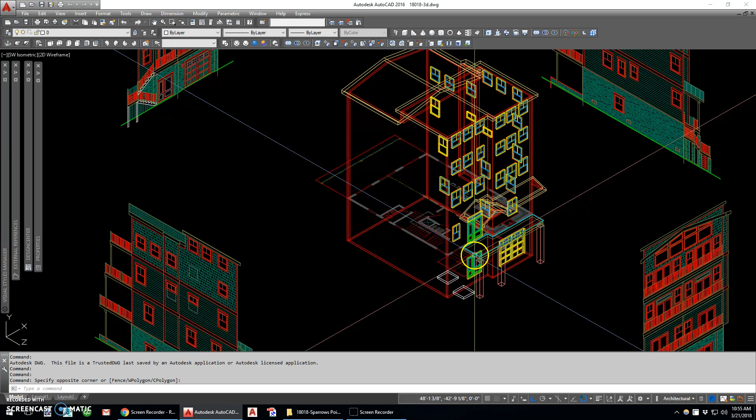All right, we're back. Not sure what number we're on, but time to make more progress and finish this job up. Right now it looks like I left off creating the staircase. I've got the landings and my deck up here. I'm guessing I drew my landings as I copy this back just to line it up, just to the bottom. So I've still got the wood decking I have to put on like this.

Since these objects are fairly done, I'm going to go ahead and match properties to something else on the trim layer. Let's go ahead and create the decking on top.

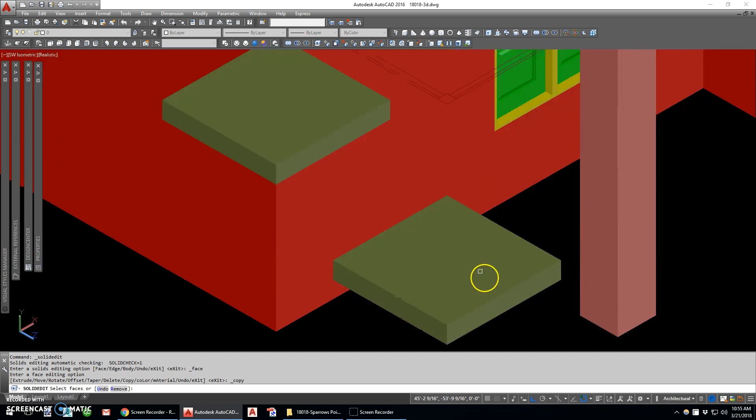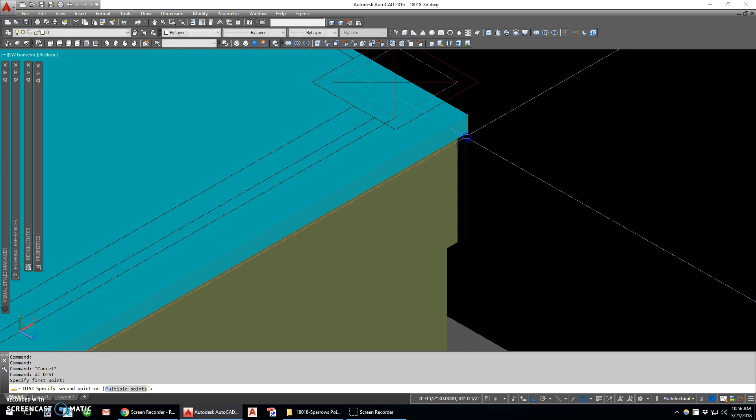I'm going to copy this face, and I'm going to copy this face. I'm going to extrude them both 1.5. I'll leave the overhangs—let's see, did I draw the overhangs on there? I did, and my overhangs were a half inch, so I'll leave these flush for now, but put them on this layer.

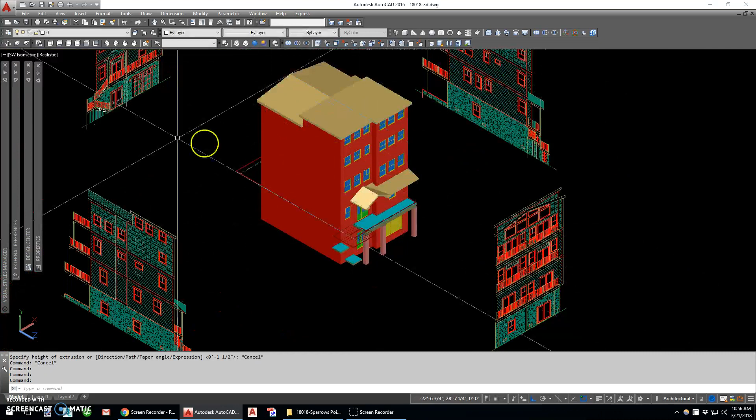I've already got my polylines for my posts. Let's extrude those out. Oh, that's right, they're drawn as posts on this elevation, but as wood posts there, and as big stone posts there. So I'm going to go with my wood posts for now.

These posts are 6 thick, so I'm going to copy these back 6 and then subtract those out of the original. That gives me a square post.

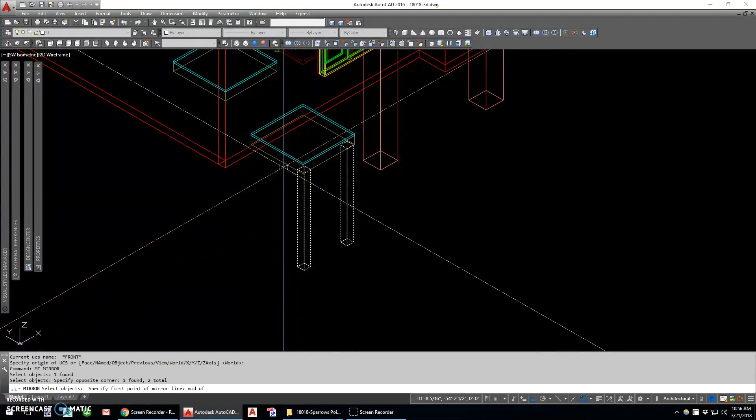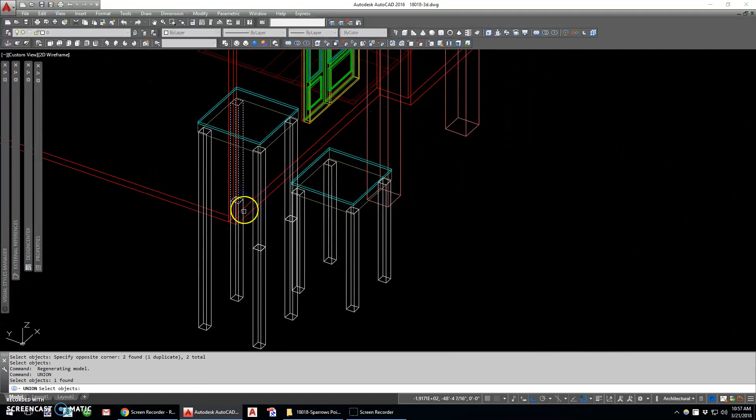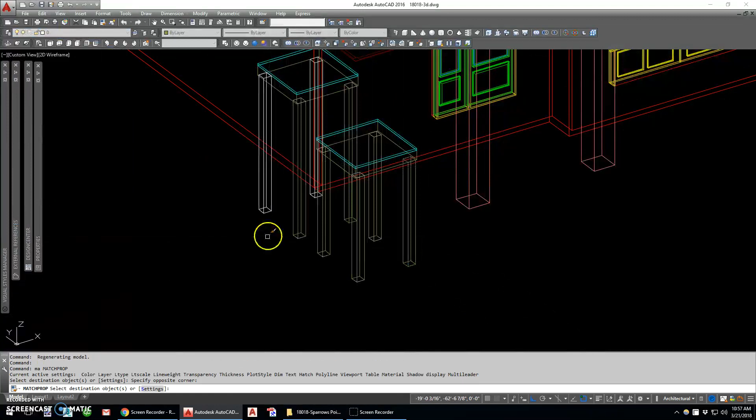So now they're lower, so now I'm going to slice these posts to the bottom of these posts, keep the top. Okay, I'm going to put these for now. I've got a layer called 3D Wood Vertical, so I've got my vertical wood. If I put a wood grain on them, I can orient those vertical.

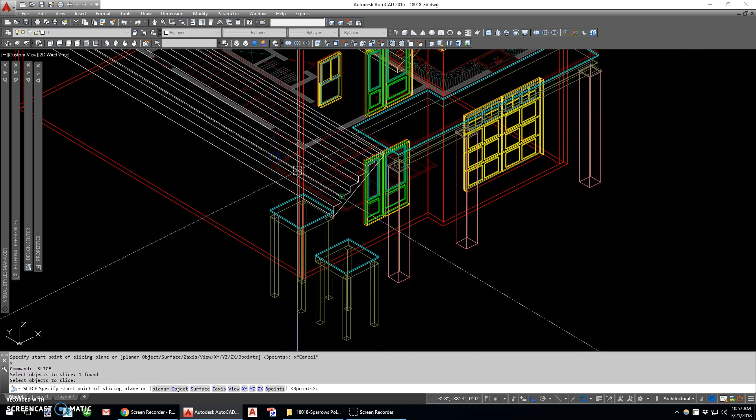I'm going to go ahead and draw these stairs. I've got the polylines drawn, again not with the decking, but I'm going to extrude that out. I'm going to use my plan to determine how far that goes. Slice these off on my ZX axis. At the house, keep that side.

So that's a flight up there. Let's do this while I'm at it. Again, we're using this as a reference. Slice that Z, keep that side. Those look about right.

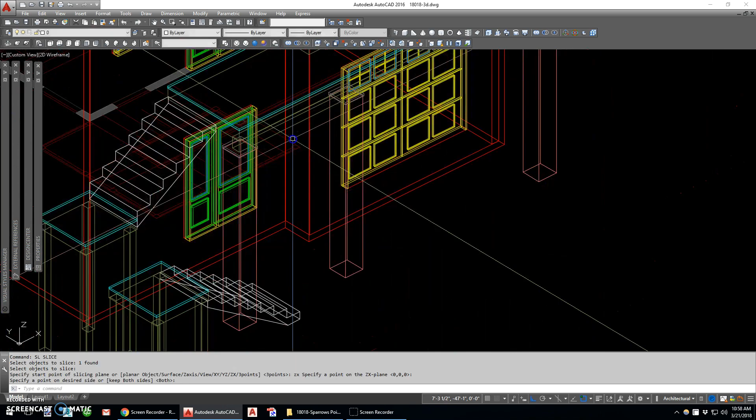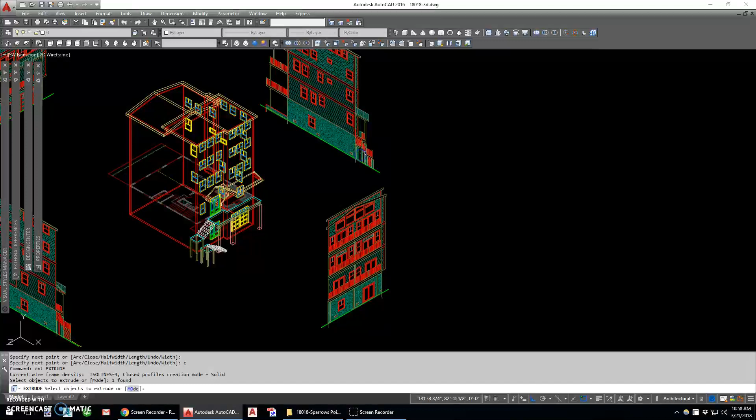It looks like I need a staircase here, so I'm going to look at the left side and draw this. Let's find the intersection of here and here. Go perp here, here, close that, extrude it. Again, I'm using my plan as my reference. Going to keep, slice, XY axis. Keep that side. And I'm going to make the treads now.

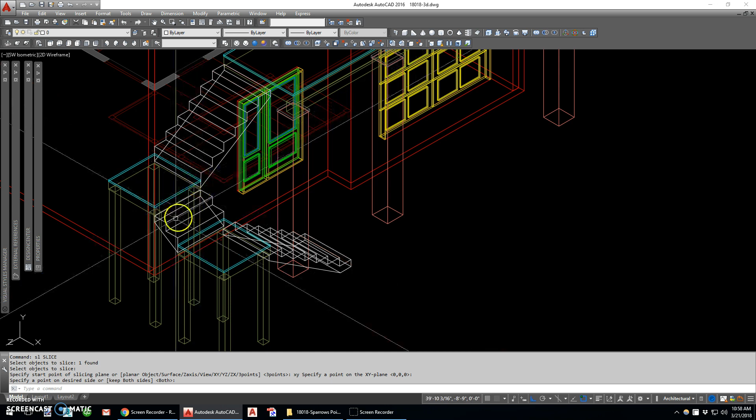So actually, I'm going to put these on the deck layer, but now I want to make the treads on everything. So what I'm going to do is union these 3 objects together. Then that'll allow me to copy all these faces on the 3 objects at the same time, since now they're the same solid. Whoops, now I selected the back side.

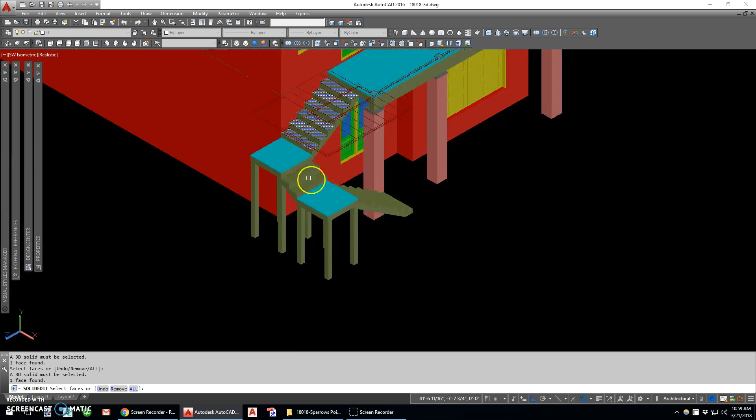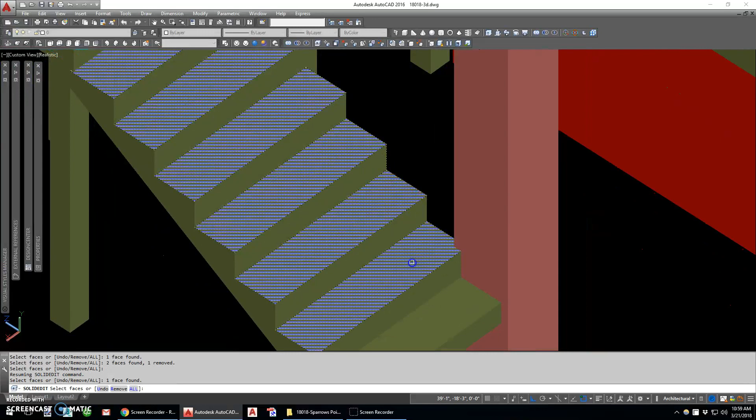I'm going to hold shift and hit that again. Now the display still shows that it's selected, but I think it's going to be right. So I'm zooming in close so I don't hit something back there. Let's try this—ooh, I've got this face, I don't want that. And I'm going to use the same base point for all of these.

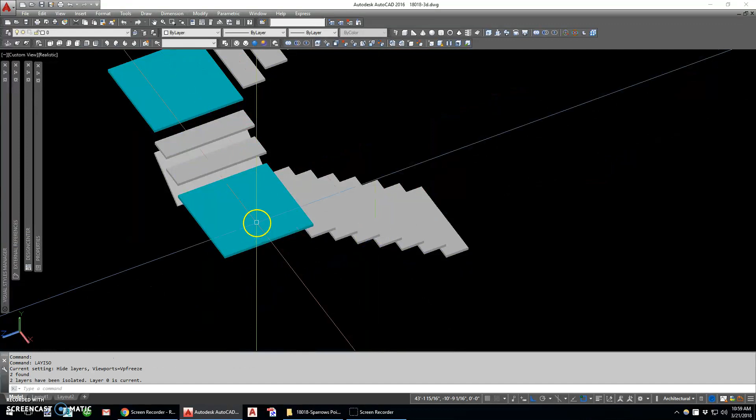Now those should be the only objects in here, so I'm just going to window this whole thing and extrude everything 1.5. I'm going to go ahead and isolate these 2 layers so that—oh, I got an extra object down here I don't want.

Now I'm going to match props. LAYUNISO, and we're back up here. It looks like I got the stairs and posts. Now I may be replacing these posts with these posts later—in fact, yeah, I'm going to do that later if need be.

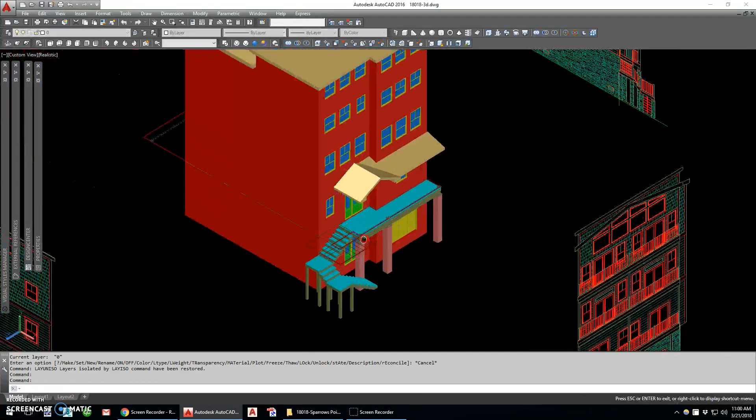Now it looks like I have to draw some railings. Let's go ahead and do these columns first—I like to do the big objects first. We've got some posts here. I'm going to look at the front, go back to my isometric, and draw some rectangles for these posts.

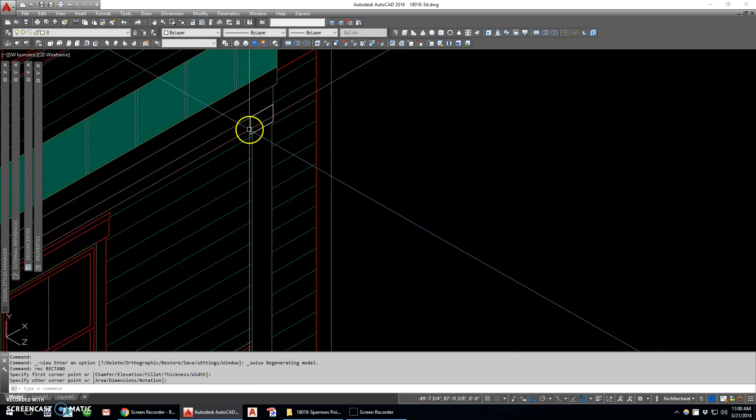Extrude the—actually, I'm going to copy this object and find a corner of the post. Copy it here. Set my UCS to ground. Rotate this so it lines up with my elevation. Now I'm going to extrude these three things really far and these three things really far.

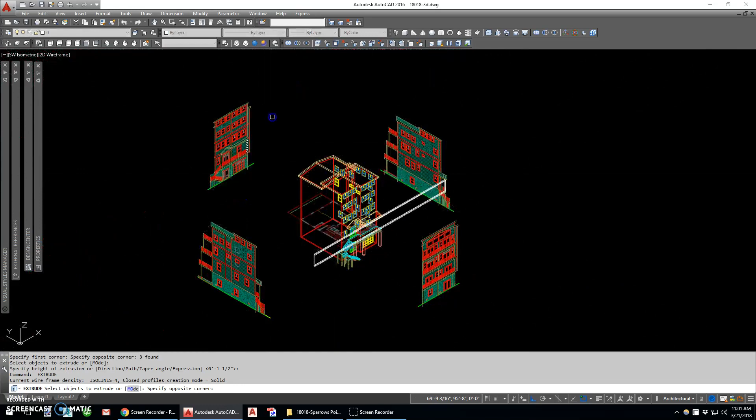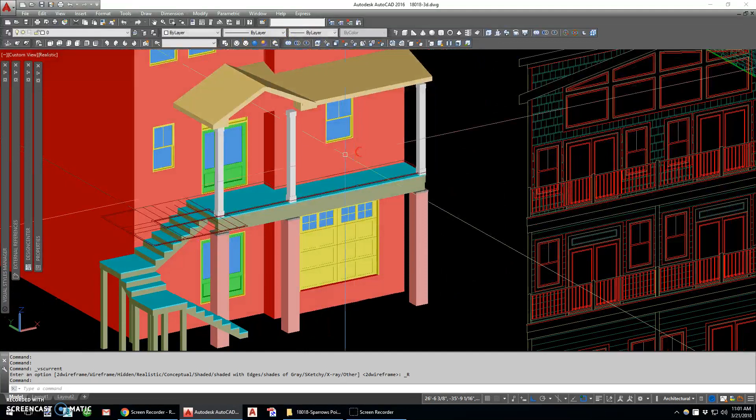Then I'm going to union these together, and then do an intersect command. Bam, got a column. I'm going to copy that column based on the front elevation—here, here, and there. Let's look here, those look beautiful. I'm going to match them to my trim layer. It looks like I need a beam going around this porch.

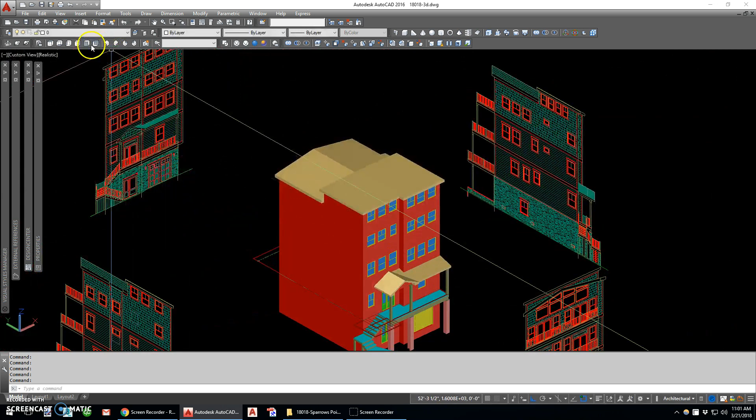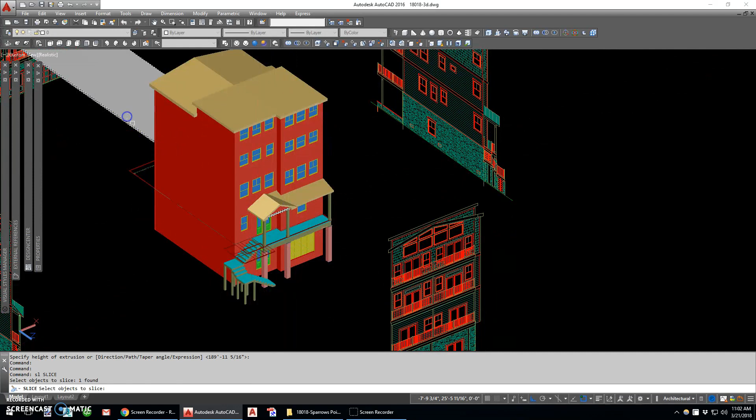Again, that's this beam. So what I'm going to do is look at the front, use the southwest isometric, and draw a rectangle over this whole beam. Extrude that out to my elevation where the beam is. Then I'm going to slice that whole object to the furthest point back that I want, which is the front of this house.

Keep that side. Now if I orbit, I can see just that object, which I actually want to make hollow. So I'm going to layer off 3D star, so I'm just left with this object.

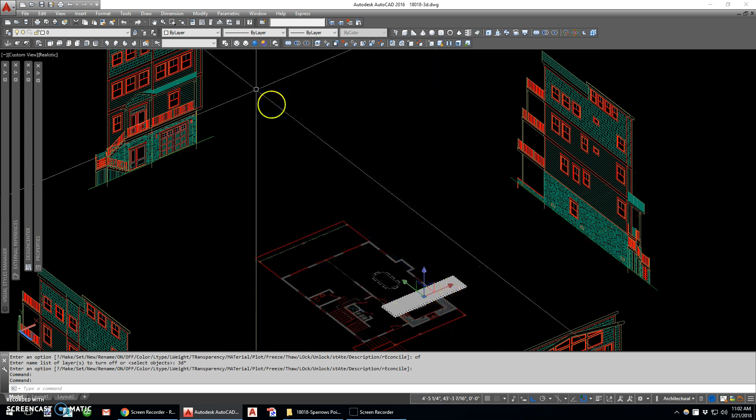I'm going to determine how thick I want that beam to be by doing a distance from the middle of the column to the beam. That's 7.5, so let's make the beam 15 thick.

First, I'm going to do this a different way. I'm going to go to my wireframe, set my UCS to ground, and draw a polysolid. Here I'm going to define my height as the height of the beam, the width as 15, and justification left. Now I can draw—whoop, I did my justification wrong. So let's just finish that and we'll go from the other end.

Erase this object. I think I need to slice this because this sticks out on my XY or my ZX. Keep both sides. Now I slice this as well. That's one object. I'm going to use this separate command, which turns this into two separate objects, so I can delete the one I don't want and union this stuff back together.

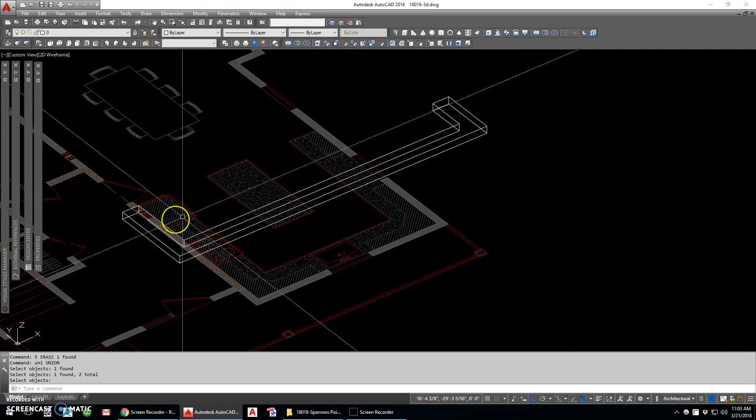Layer on 3D all. I'm going to go ahead and look at this, make sure it looks right, and put it on my trim layer.

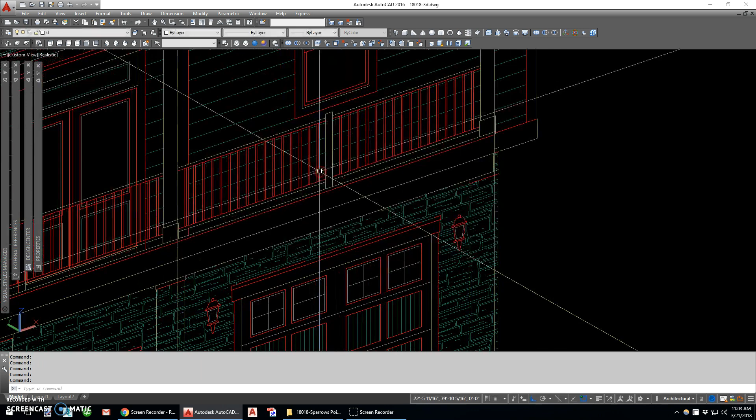Alright, let's go with the railings now. This is fun. For the railings, I'm guessing it's going to be a white vinyl railing.

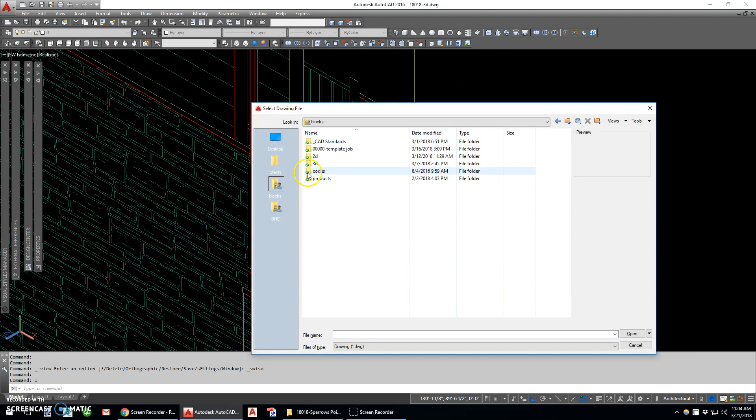I have a block that I'm going to insert on the front elevation. Actually, let's use my side elevation, my left side isometric. I know the block, the railing's going to be centered on this column, so I'm going to insert. I have a 3D blocks folder, and I've got something called a railing profile. It's a very simple shape.

Let's erase that. Insert, and I'm going to do mid between 2 points. And enter. I'm going to explode it because it's a block. I'm going to go to my wireframe view.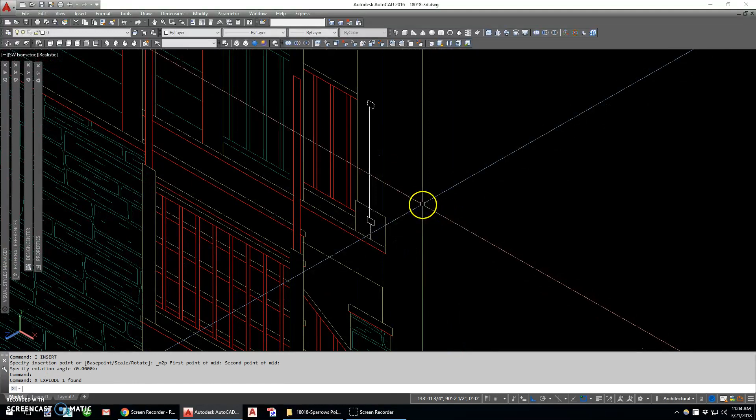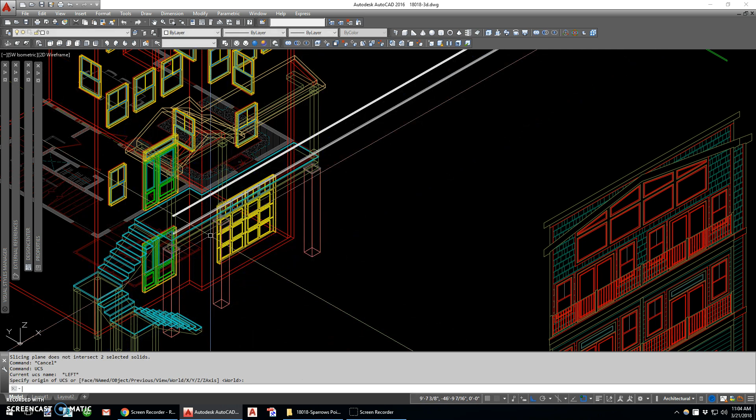Now these two objects are my railing, so I'm going to extrude those all the way to this last column, and slice these at this column. Keep this side. Whoop, that didn't work because my UCS was different. Let's do it again. Slice, YZ of here, keep this side.

Now I'm left with this rectangle for my railing. That rectangle's 3/4 inch thick, so I'm going to extrude it 3/4.

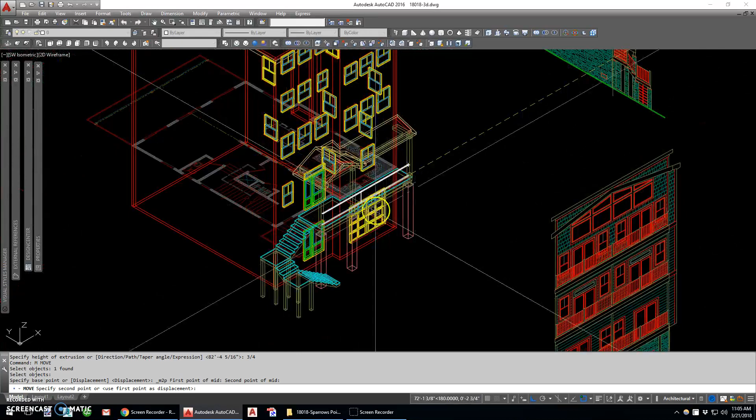Now I'm going to move this from the mid of these 2 points, and I'm going to put that in the middle of the bottom railing, using those 2 points as well.

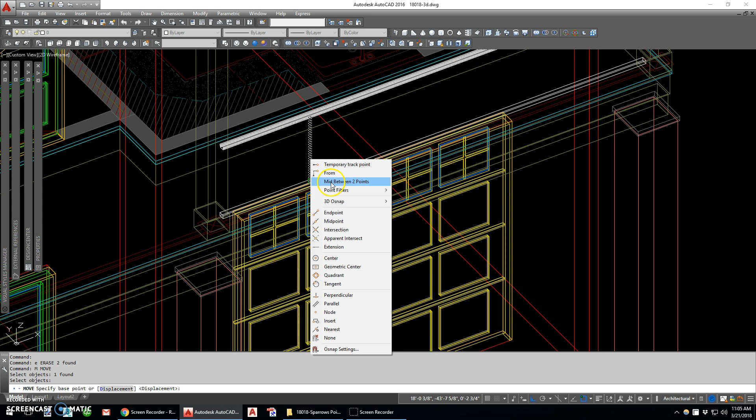Actually, you know what I'm going to do? I want to kind of break this railing at this column. Get rid of this part because we'll use the part we make. Now I'm going to move the middle of this bottom to the middle of the bottom rail.

And then I can use the standard array command, rectangular, no row, 1 row, let's go, I don't know, 30 columns, 4.75, that puts 4 inches between them. This is really close, so what I'm going to do is take all of these and move them over half of that 4.75, which is 2.375. Erase the ones I don't want.

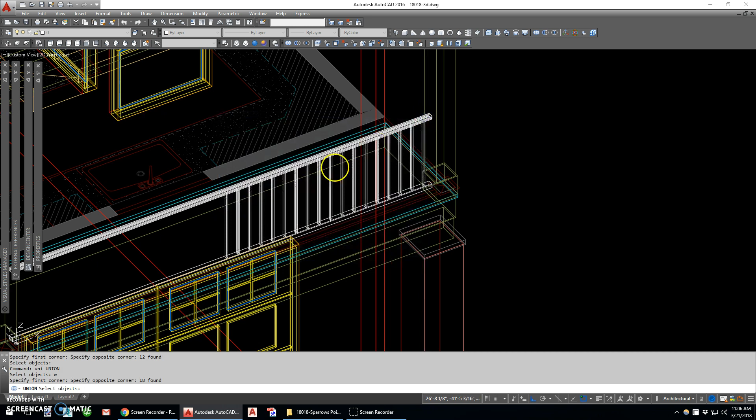Just to make my life easier, I'm going to union all these together, which makes them one object that I can mirror at the middle of this rail. And the spacing should be right now.

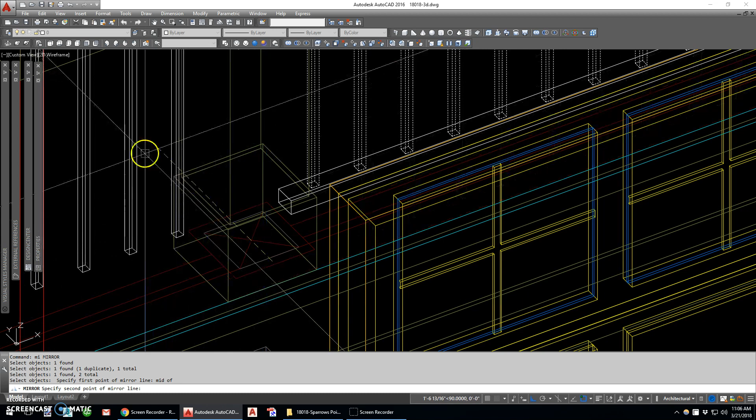So I'm going to union those together and the top and bottom rail, because I'm sort of going to treat these as one. Now if I mirror these 2 objects over the center of that column—let's try that again. Union this and that. Alright, now if I mirror these over the middle of my column, we're all the way to here. I'm going to go ahead and slice these 2 objects at this column.

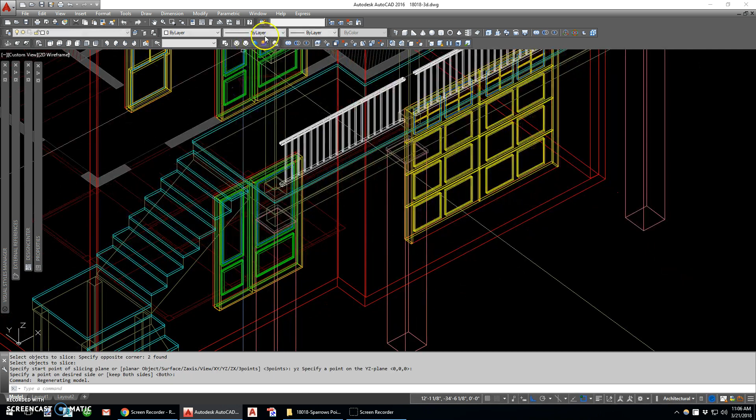Keep that. It looks like we have—let's get a better view here. It looks like we have a little piece of railing that returns with a post. Let's draw that post. So I'm going to look at the left side.

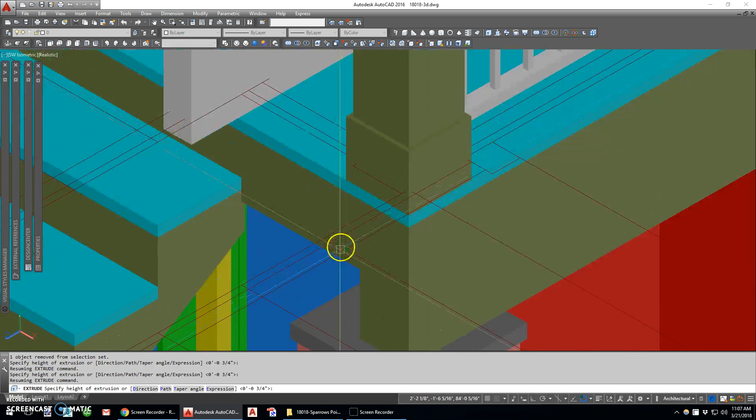And here's my post, here's my rectangle. I'm going to extrude that all the way to the edge here of, let's go to the deck, not the decking. And I want to see how thick that is. So that's 4, so I'm going to copy it back 4 and subtract it out of my shape.

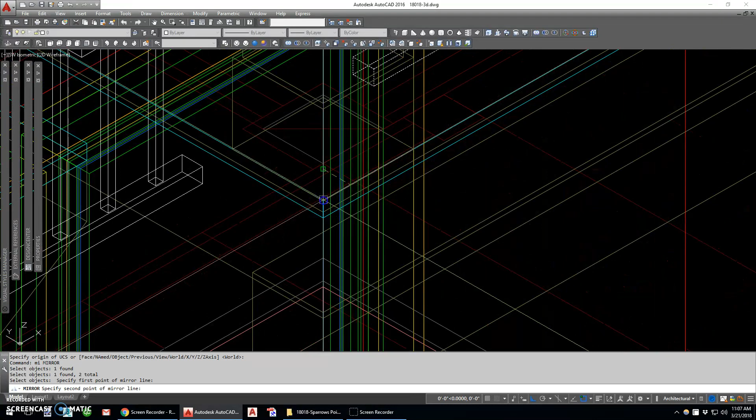Alright, now I'm going to set my UCS back flat and mirror these. I'm going to use my corner mirror trick, which is to take 2 corners at a 45, which mirrored it over here. Now if I slice these on my ZX, keep that. Looks like I'm good. Let's take a look here.

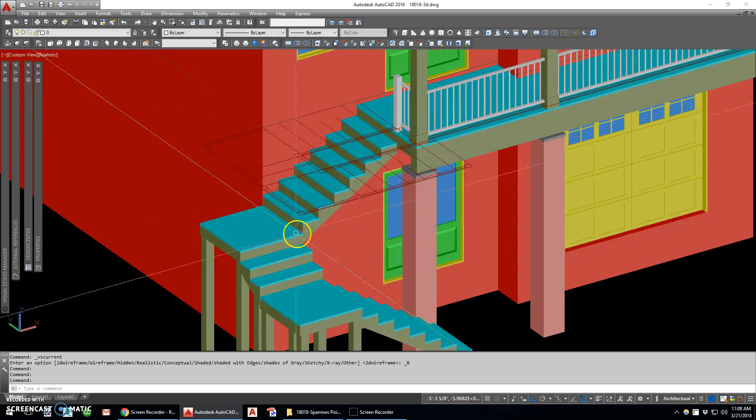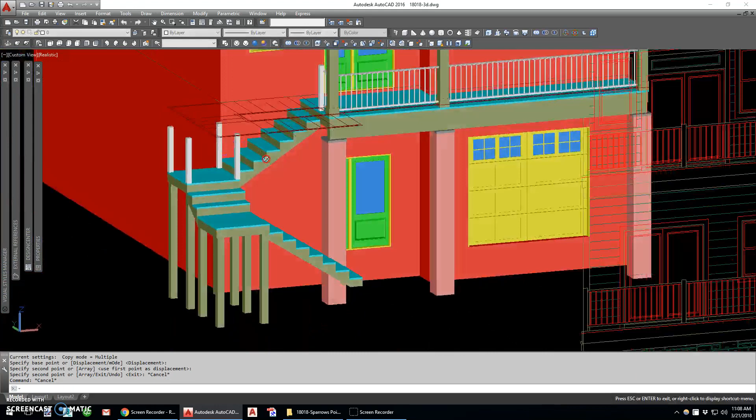Now it looks like we're going to have some posts, some of these little posts on these landings. I'm going to go ahead and just copy these for now, where I think they go. Copy these. And that's why I didn't do the overhangs yet—I can do those later, but I wanted my posts at the corners of the major geometry.

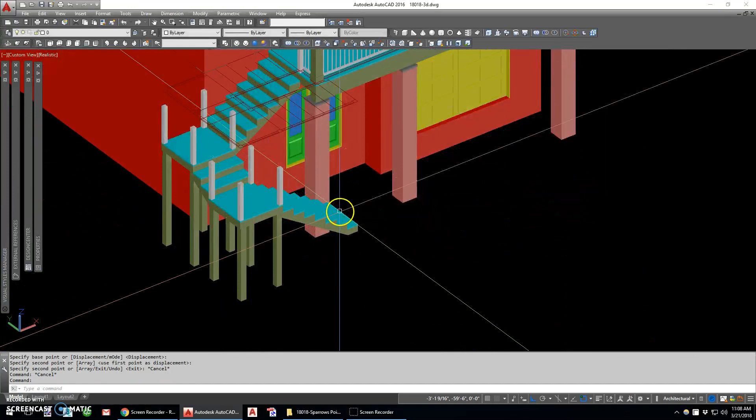Let's copy this. Let's copy these. Depending on where the rails come in, those might have to get taller. And then it looks like I would have a post down here—a post. I don't need that one because I got that big stone post there. Alright, those are my posts.

Now I need to run railings down, which is kind of a pain in the neck, and I think it's going to be the next tutorial.